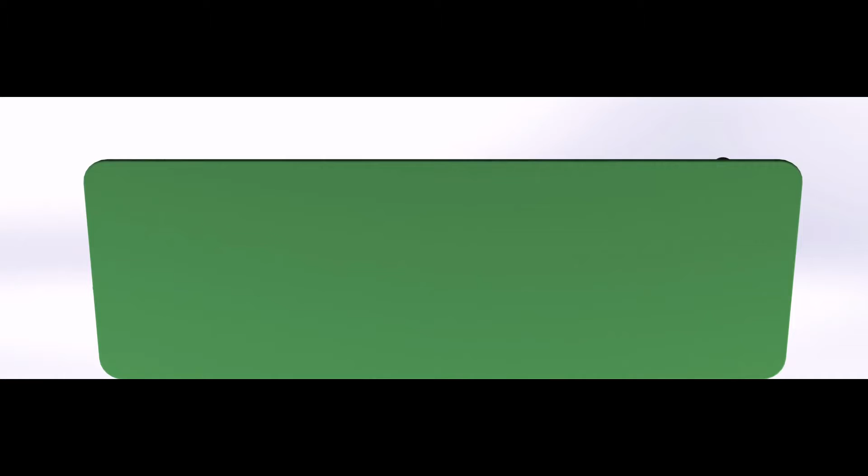Farming is a big business here in British Columbia, and although this is great for our economy, it has its own drawbacks. One of the biggest problems associated with high farm density areas is the soil and water contamination they cause. A simple but accurate description of this problem is as follows. There are two main pollutants: contamination of water from preservatives and pesticides, as well as over-fertilization in the form of manure pits. Our company, the Excrement Kings, plans on solving both issues simultaneously via use of a state-of-the-art water sanitization and fertilizer production joint plant.

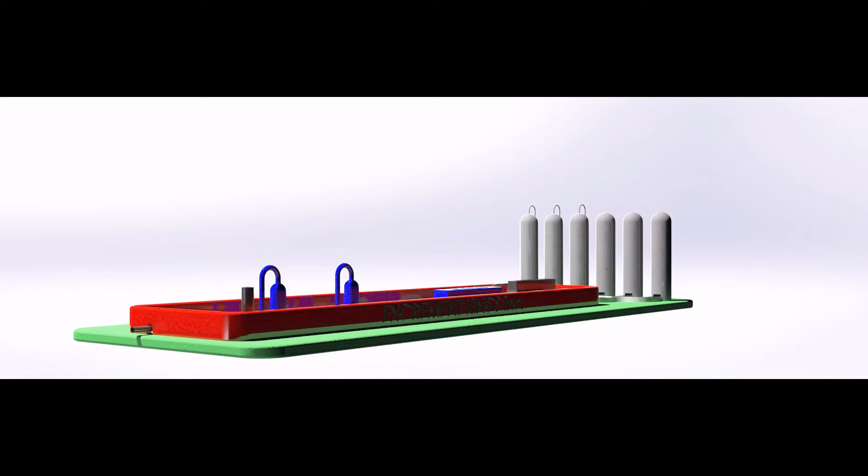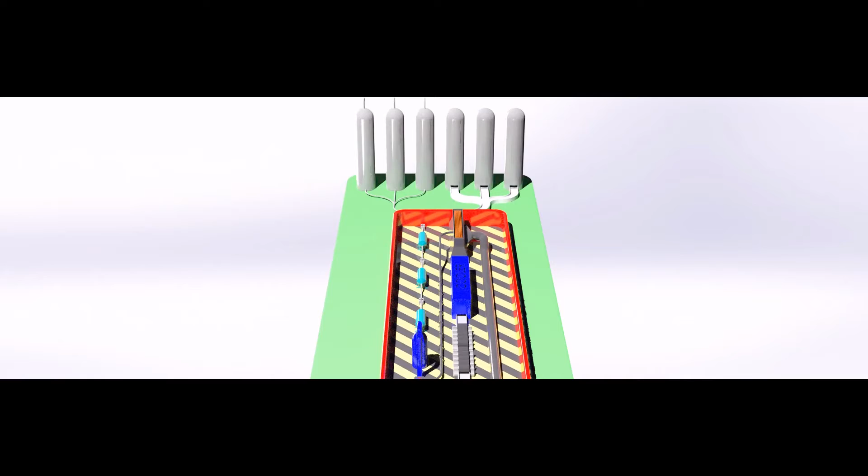We plan on doing this by offering two separate services. The first one is a groundwater runoff collection and sterilization service. For this service, there is an upfront cost and a monthly cost to the farmer. For this service, we install a collector tank which accumulates all the runoff water from the farm, and once a week our company's liquid tankers will come and collect all the water. It is then transported to our plant where it will be sterilized and returned to a river.

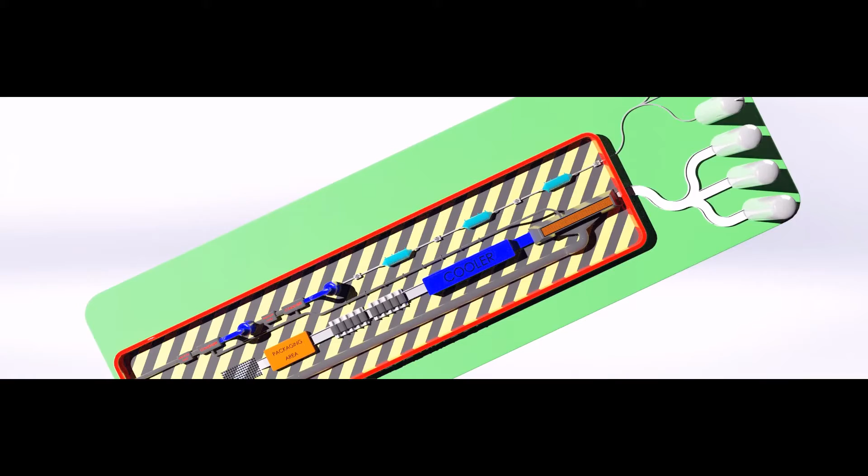The second service is a manure management and fertilizer production service. For this service, there are two options the farmer can choose from. The first choice is they sell their manure to us and we process it and sell it off as a commercial fertilizer. The second option is they can pay a cheap price for us to collect their manure and return with the amount of fertilizer they want.

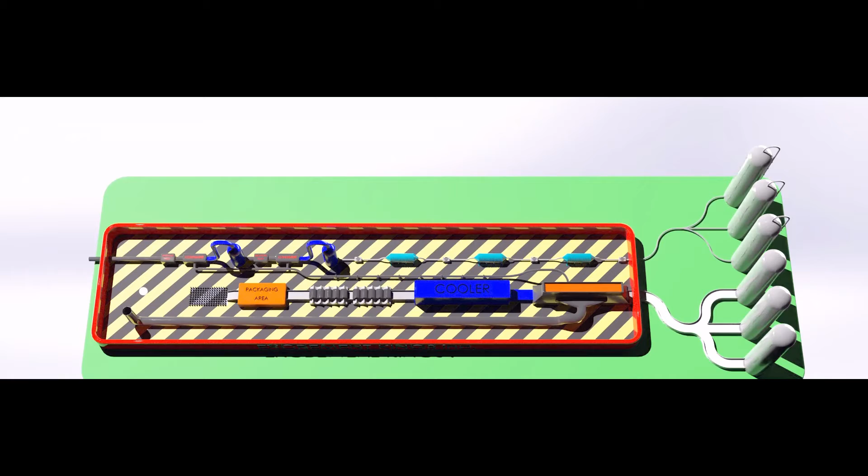It is now obvious to see why our solution offers the best overall package to the farmer for as low of a cost as possible, while being able to almost eliminate the problem of water contamination completely. But how will our company go about doing this?

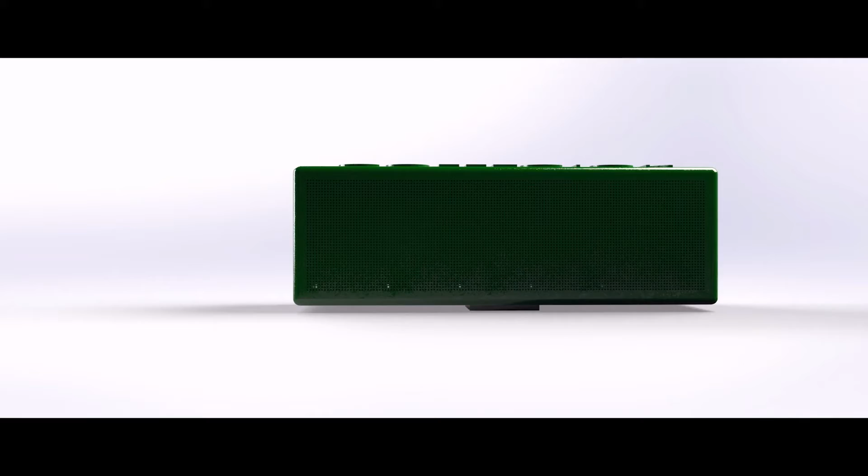Let's start by going step by step through the water runoff sterilization process. As previously mentioned, we will install liquid collector tanks at the runoff areas. The tanks will look like what we have on the screen right now. As you can see, one side is littered with small holes which only allow the contaminated water to pass into the tank. The side with the holes will be dug into the runoff area. The exposed valve on the front side is what the liquid tankers will use to collect all the liquid.

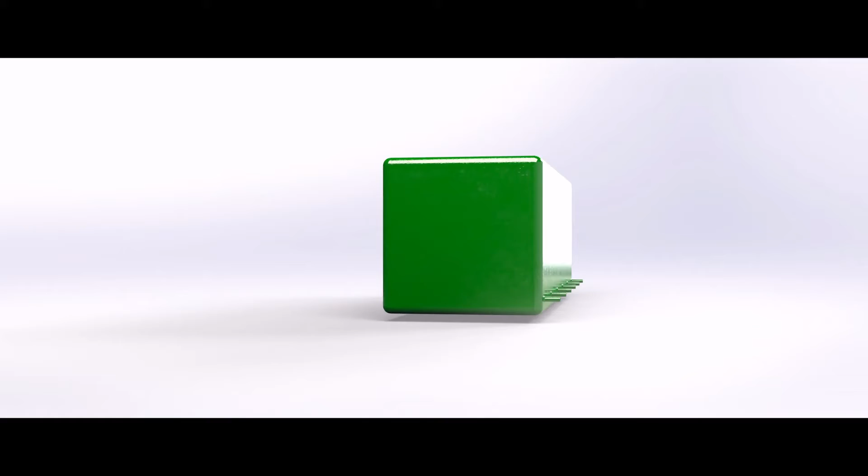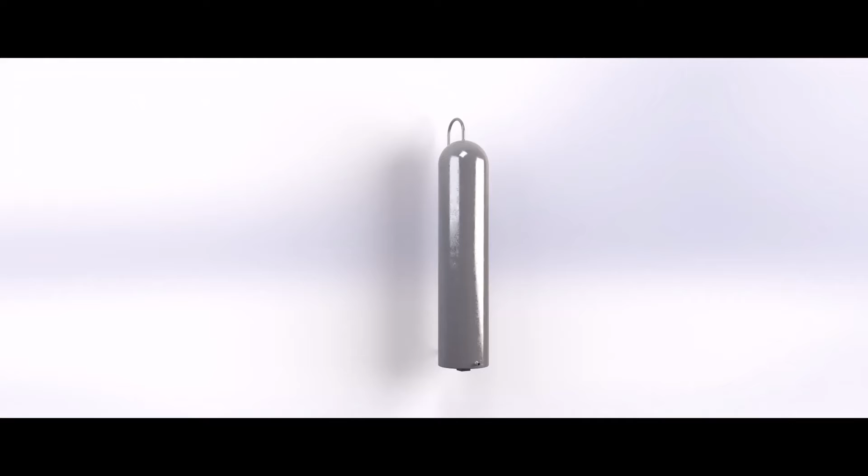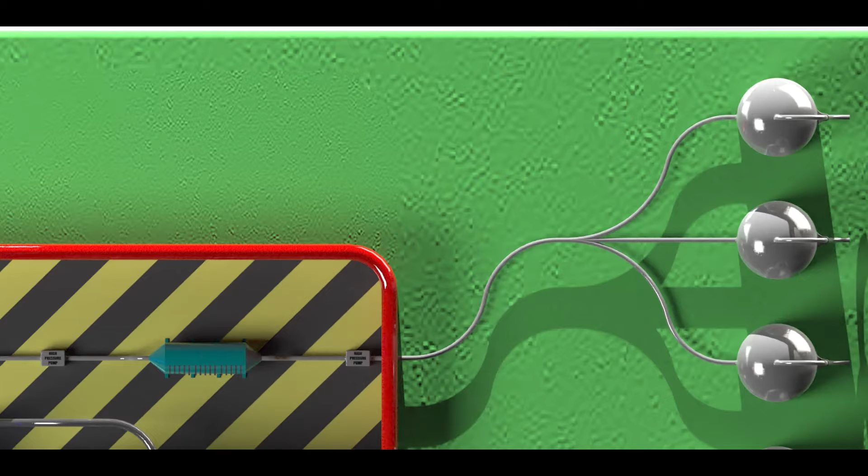All this collected liquid is then transported to one of our plants where it is then pumped into one of the large external liquid tanks at our site, as shown on the screen. Now, this is where we begin turning the collected pesticide- and preservative-infested water into clean, distilled water. First, the water is sent to a high-pressure, low-flow reciprocating pump. This is done to drastically increase the water pressure to force the water through a 15-stage osmosis filter, as shown in the bird's eye view of the plant.

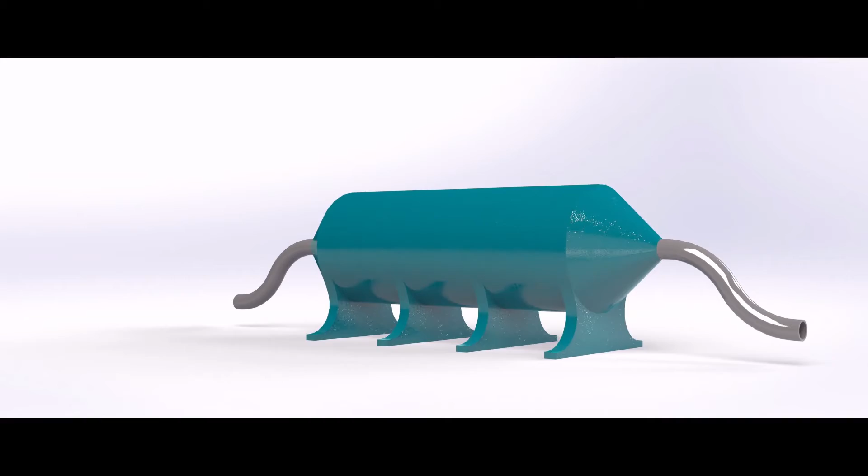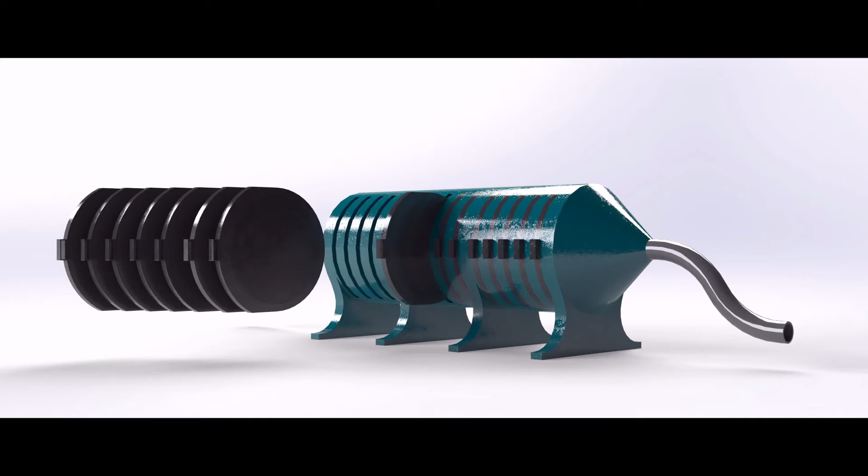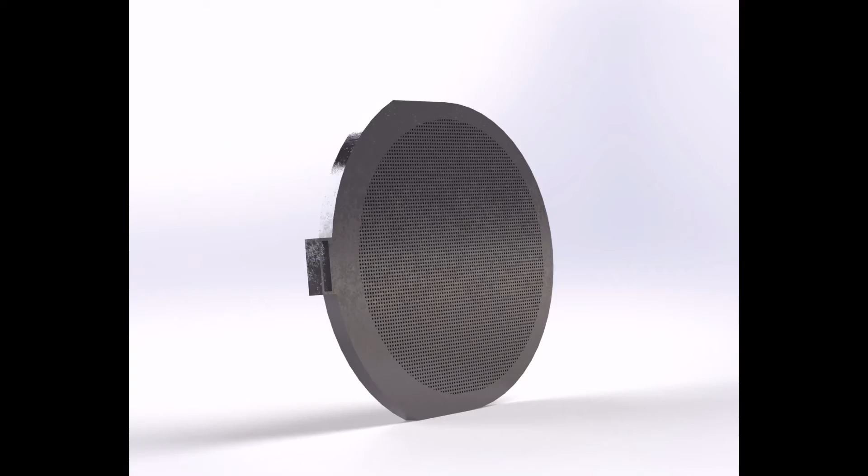An osmosis filter is nothing more than a simple liquid and solid separation system. As you can see, the filter comprises 15 individual osmosis filters where, due to extremely high pressure, only water can make it through those super tiny holes, and any physical debris is left behind. With this close-up of a single filter stage, we can see more closely how the system works. In reality, the size of these holes would be much smaller, but for the sake of demonstration, they were enlarged. In total, the water goes through 3 of these filters as well as a high pressure pump every time due to the pressure drop caused by each filter.

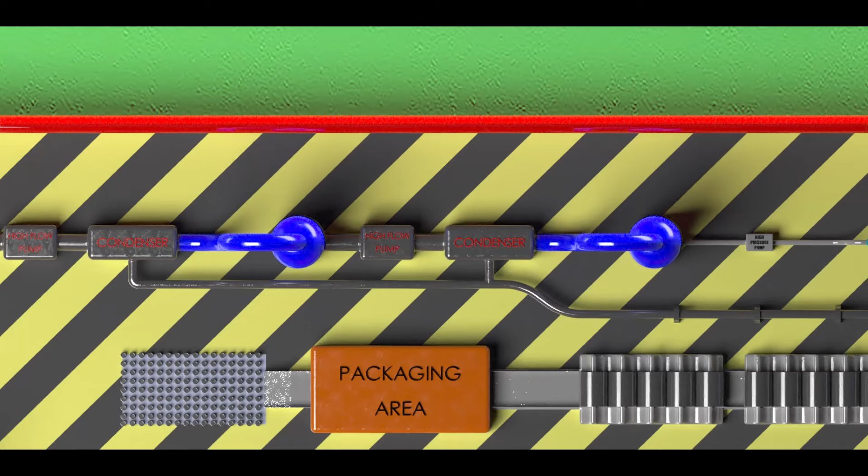Now that the water is completely free of any physical particulates, it can be sent to the first boiler. The objective here is to separate the pure water from all the other liquid waste. This is done by boiling the water and collecting the water vapor. This water vapor then goes through a condenser to turn the vapor back to liquid form. This almost pure water is then sent to a second boiler to ensure all contaminants have been removed. The vapor then goes through a condenser again and turns into pure distilled liquid water, where it is then pumped into a nearby river. At this point, we have successfully removed contaminated water from farms, cleaned it, and relocated it.

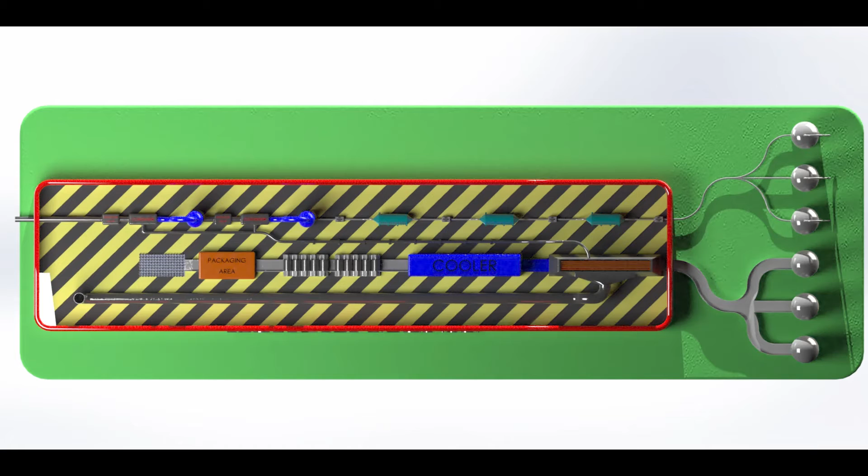Now let's take a look at our manure to commercial fertilizer transformation process. Independent of the choice the farmers make about selling or paying for the new fertilizer, the process is the same. Firstly, our company goes to the farmer with workers and trucks and collects all of the manure for the week. This will be done in a very similar fashion to how the city collects the garbage every week. The manure is then transported to our facility where it is dumped into large external tanks as seen on the screen. We now begin the journey of turning manure into commercial fertilizer.

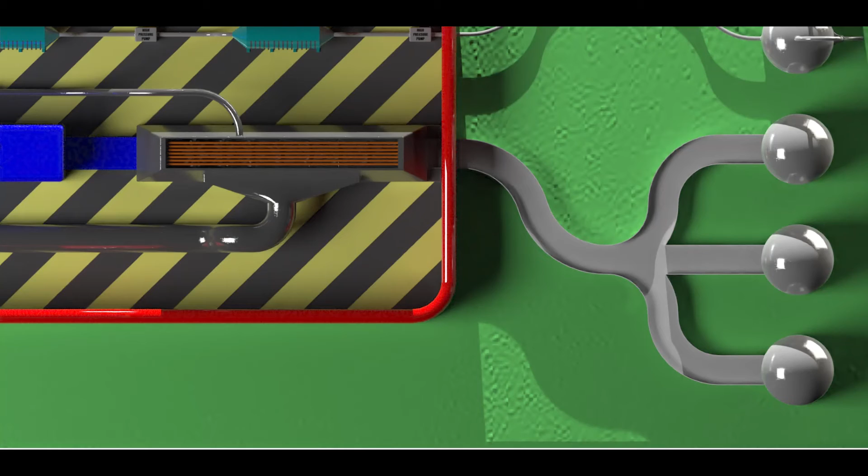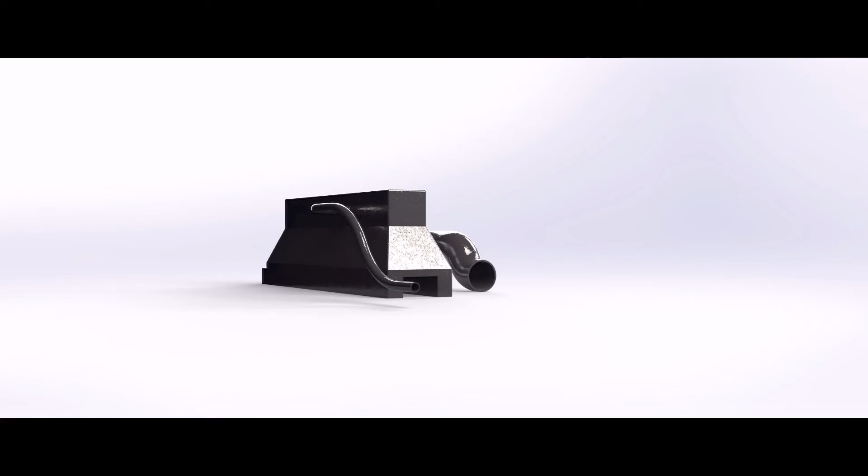The first step is to join all 3 tanks into one path via use of a 3-to-1 conveyor. Once manure is onto the conveyor system, its first stop is the dehydrator. As you can see on the screen, the dehydrator is a rather large device. Here the objective is to remove all the moisture from the manure in order to turn it into a clumpy sand texture. The dehydrator uses a set of fans to flow fresh air onto superheated coils and onto the manure. The coils heat up the air to a very high temperature. As a result, the water in the manure is evaporated and travels with the air out the side exhaust.

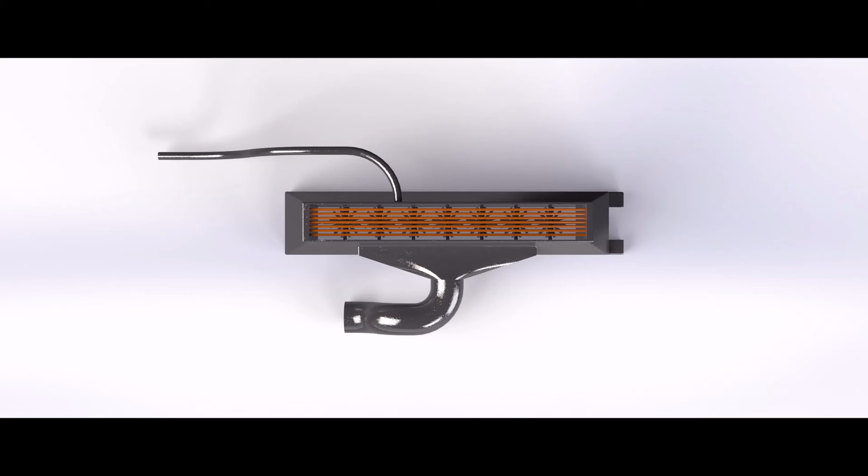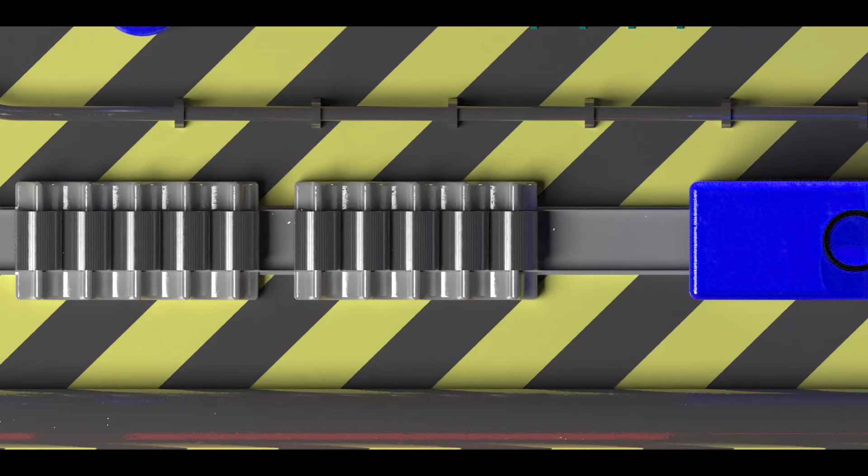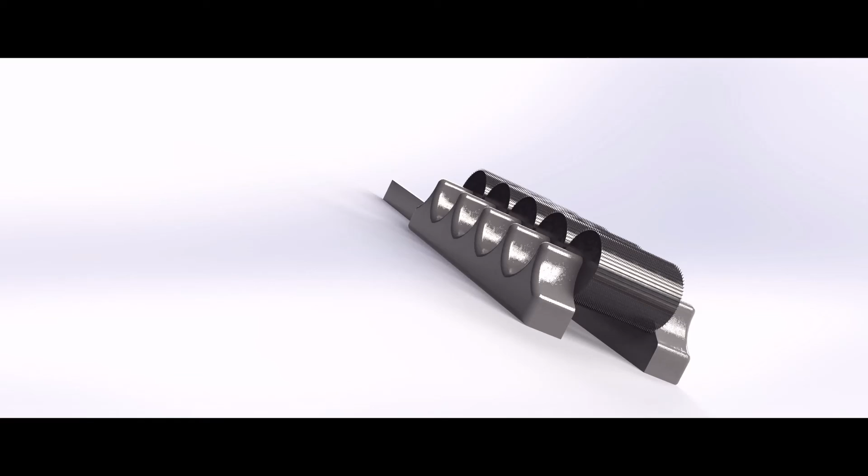We now have dry manure, but it's ridiculously hot, so before we can do anything to it, we must send it through a powerful blast chiller via the use of the same conveyor system. Now that the manure is cooling back to room temperature, we can send it to the next step, which is granulation. To achieve the desired fine-grained consistency of commercial fertilizer, we send the manure through a sequence of spiked drums, which crush and tear apart the manure. As you can see here, we have opted for several of these drums to ensure maximum granulation.

Our product has now successfully turned into commercial-grade fertilizer and can now be sent to the packaging sector of the facility where the fertilizer is packaged into drums, ready for trucks to deliver to farmers. In the end, our company can offer a cheap and effective water cleaning service that eliminates the problem of nearby water contamination and the problem of over-fertilization, all via use of an external treatment plant. With this in mind, we as a group hope that our design can and will help change the way that waste is treated on farms.